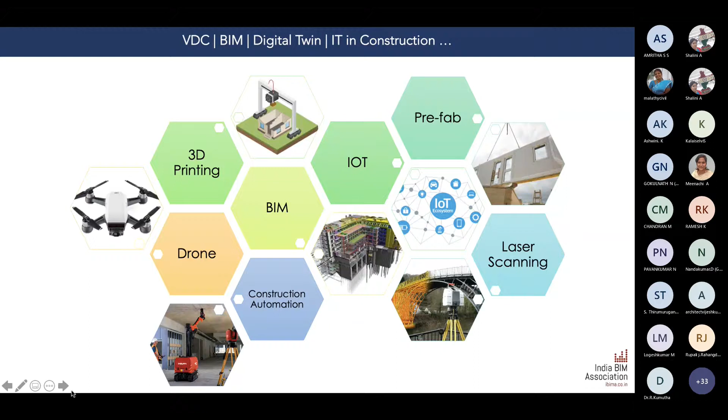Stage 5 and 6 is where the contractors, subcontractors, and the supply chain team come in and start executing the project using that BIM model. Stage 7 is where you hand over the digital twin and the maintenance team starts using it to integrate with facility management systems.

So each of these phases has different participants coming in and different data getting generated, and all of that is managed through a common cloud-based BIM platform, so that anyone can access any data at any point of time - no need to wait for anyone else. RFIs can be reduced, rework can be reduced, clarity can be increased, cash flows can be made easier, and many things - transparency also increases.

Non-graphical data is nothing but parameters, like what the door is made of, its dimensions, thickness, material, who manufactured it, its lifespan, warranty, when it was installed, maintenance schedule, and so on. Documentation means warranty cards, test reports, and other such things get attached to the same element in the BIM model.

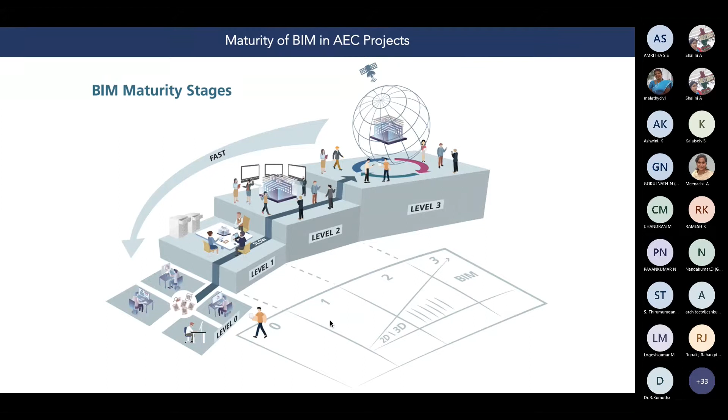So I just want to give you two examples here about return on investment. Department of Health office building in Victoria Street. This is again from the PwC report.

The BIM maturity level here is a little bit high. The client is asking for 100% BIM as per level 2 requirements. Project BIM maturity is around 93% of what the client has asked, and supplier BIM delivery is around 91%. You can see this figure. That means most of the BIM delivery capability, data verification, validation, collaborative working are all like 100%. The construction BIM capability is only 40% here, meaning people don't have that skill for site activities.

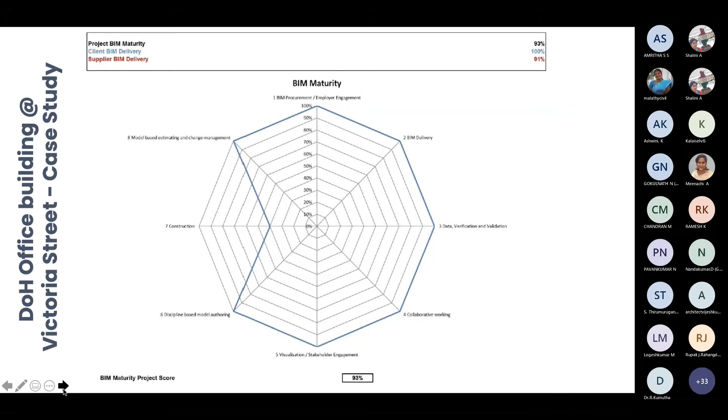If you see the return on investment here, there are three phases: design, construction, operation. The overall project cost is 22,526,574. Out of this, with that maturity of BIM in the project, they were able to save 3% of the actual cost. What they've considered here is 12 years of maintenance, because they started the project in 2016, construction completed in 2017 September, and they're considering 12 years of maintenance. That means with this level of maturity, they're able to save only 3% of the overall project cost.

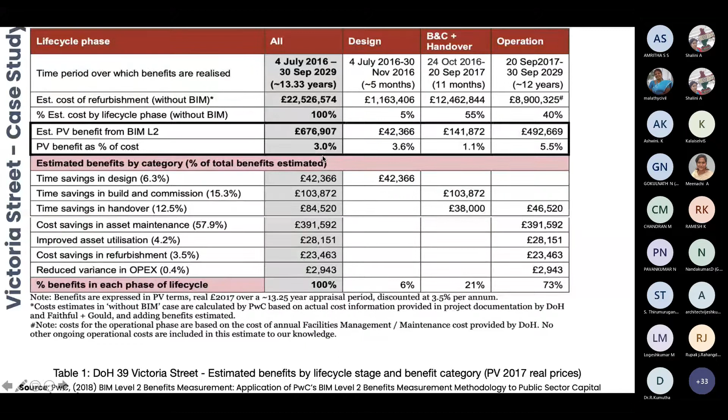But with a matured BIM, you can do better. Looking into the next project, this is a River Foss Barrier upgrade case study. Here the maturity of BIM is a little bit less than what you saw in the previous slides. The client BIM maturity, meaning what the client itself is asking, is only 68% as per level 2. The supplier capability is 80%, and overall project BIM maturity is 62%.

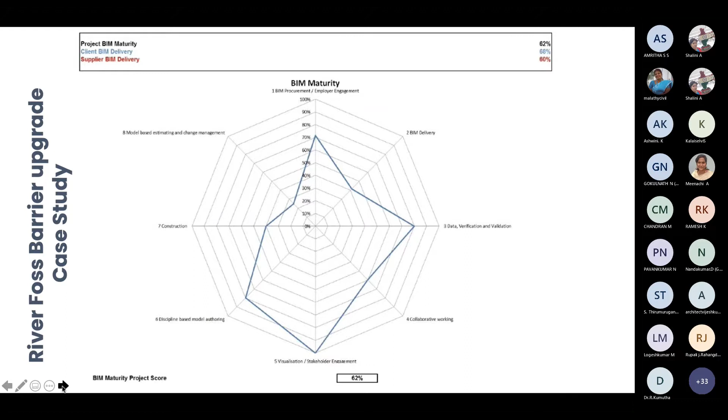As you can see in this figure, all these maturities are less, like 60%, 70%, except the visualization capability which is 100%. So if you see the return on investment here for the cost, 23,748,302 is the overall project cost, including 27 years of maintenance as an approximation. So 1.5% is the project cost savings. This is less than the previous one, because of the maturity of BIM in the projects.

So don't blame BIM, but blame the way we do BIM. If you are not doing a matured BIM, you don't get the returns. This is very much critical to understand, and we need to build capabilities across that so that BIM really makes sense for adding on further.

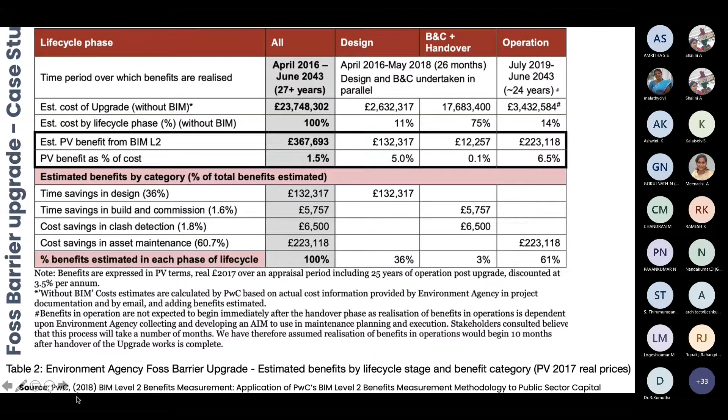Just give me 1 minute. Yeah, sorry for that, there was an emergency call.

So looking into our AEC project stakeholders, that means architecture, engineering, construction. What does this mean? Architecture and engineering includes both design and construction people, and construction includes contractors, subcontractors, civil engineers, and other people coming in. So all these professionals need BIM education. There is still a misunderstanding that BIM is for architects, and for civil it may not be required to some level, and MEP may not be focusing on that. No, there are different kinds of misunderstanding, but it's important for all of us working in the construction sector, especially.

And the skills are different. It's not that everyone needs to learn a software or modeling. There are different skills and competencies, and they have different job roles as what they usually do. It's the same job role they have to do, they cannot change their job roles. If I'm a planning engineer in a traditional approach, I have to be a planning engineer further also, but I have to upgrade for digital projects.

If I'm a quantity surveyor, I have to be the same QS person, but with a BIM way. And if I'm a designer, I should be a designer again. Architect should be an architect again. Civil engineer cannot become an architect, and architect cannot become a civil engineer or a construction manager. So we have to play the same roles.

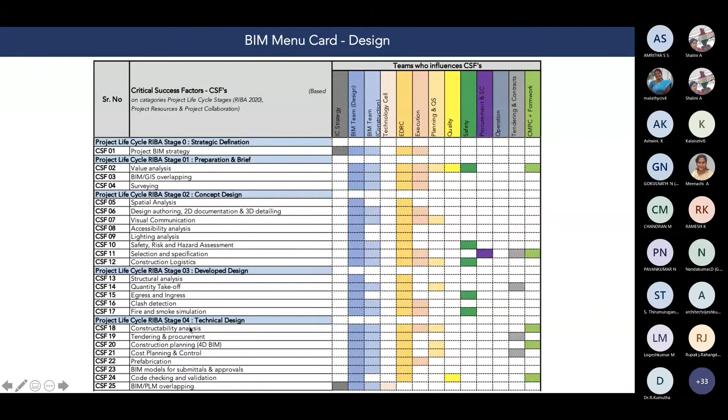So BIM is nothing but like a menu card, and if the client is very mature, he understands by implementing which BIM use cases, what return he can get, and he will ask for them. Most North American clients and a few others are very mature and they use it and ask their service providers to deliver. In India, clients are still not so mature to ask for all of them - they're asking for 15 to 20 of these items, and the service provider is also delivering it.

But today the client is asking for 20 items. Tomorrow, in another one or two years, the client will start asking for all 40 or 50 items. Then we have to have those capabilities built in the company. If we cannot, then we don't have the capabilities to deliver that project itself. So it's very important not only to build team capability within the company, but also among your partners, because you're partnering with those companies to deliver the projects. Only if your company is mature - if your partner is not mature, you're not going to deliver a mature BIM project. So it's important to understand this ecosystem approach, a holistic approach.

And if you see 3D modeling, 4D BIM, 5D BIM, 6D BIM - these are the items, the use cases, that you saw in the previous slides.

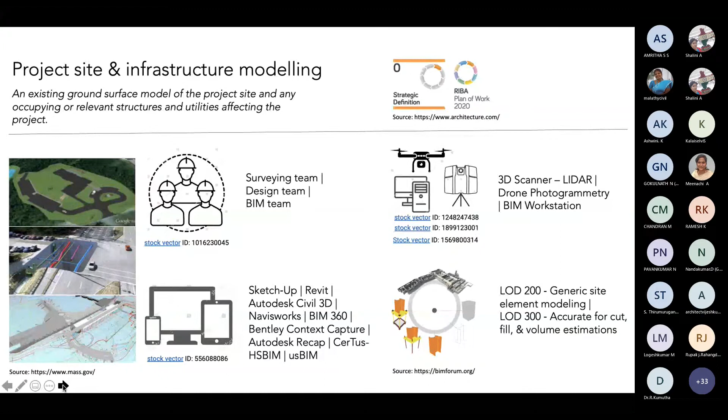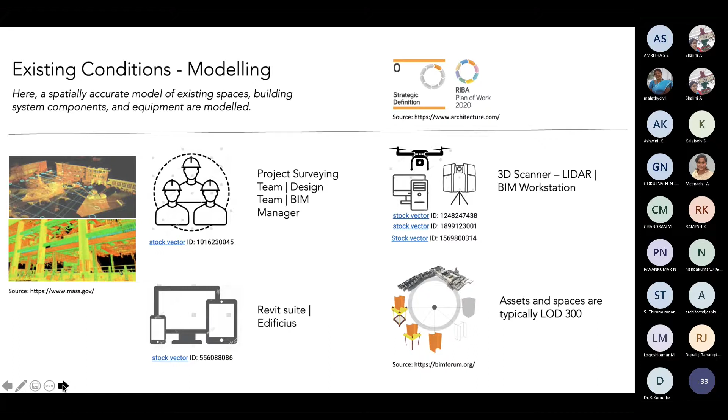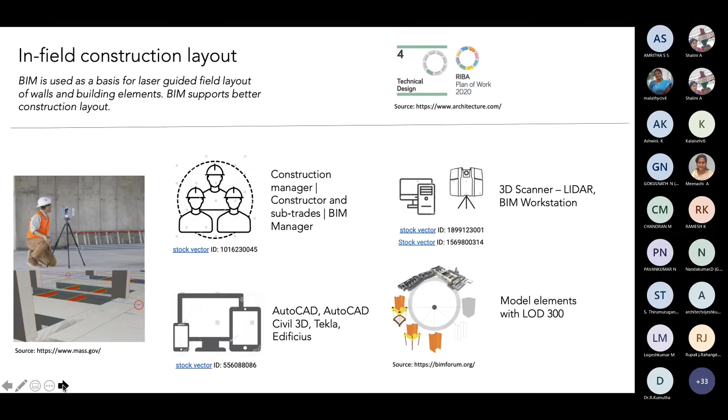So, existing condition modeling: again, if there are existing facilities, you have to capture that. You may use laser scanners to capture the point cloud and use it further. This is for in-field construction layout. For example, if you have a BIM model, you put the points into the total station, and with those points you can guide the site assembling activities for prefabricated components, and also take site measurements and actual installation positions back to the model so it becomes an as-built model.

Laser scanning for the construction activity — you would have seen people doing laser scanning during site construction progress. One use is for progress monitoring: every quarter or six months they do the scan, overlap it on a BIM model, a 4D BIM model, and see if they're ahead or behind schedule. Other times it may be to capture the digital twin, an as-is representation BIM model, so it can be used for facility management.

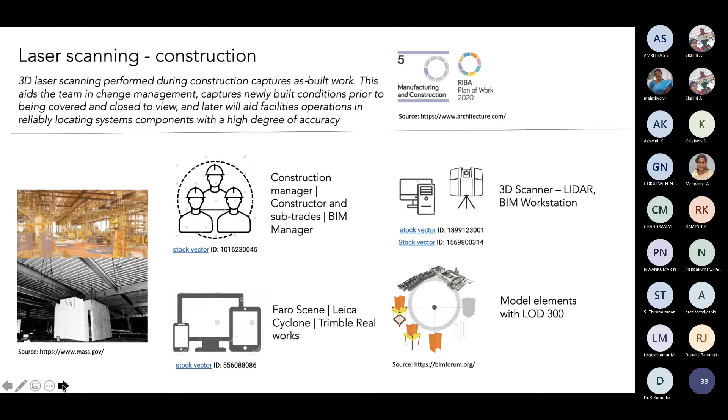BIM rooms help coordination meetings, because you have several site coordination meetings among different participants. If you just put a CAD drawing in front of them, people's imagination goes in different ways. Put a CAD drawing in front of 10 people, and all 10 cannot imagine the same way. But if I put a BIM model on big screens with walkthroughs, everyone is on the same platform, thinking on the same line. So the coordination meetings become easier, resolutions become faster, and it becomes much smoother.

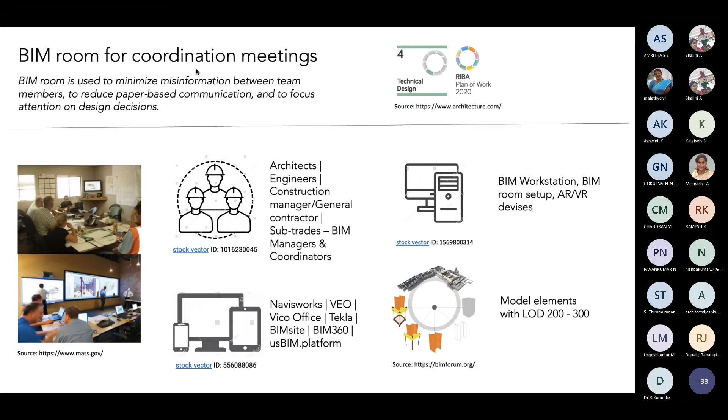You have the whole team on site, because a BIM room is nothing but big screens, projection systems, and people able to walk through the BIM models. Today there are companies having shipping containers with this entire setup assembled, so you can move the container from one project site to another. It has everything set up for BIM meetings, so people just get into the meeting room, drop that container at any project site they want, and so on. Things are automating these days.

Logistic planning involves different equipment on site—several machines, cranes, traveling parts, several buildings under construction, several material dump yards. So it's very important to monitor and plan the site activities and movements of each of these, which we call logistic planning. There are softwares like Synchro, Fuzor, Timeliner, Vico, which help you do complete site simulations so that you can avoid a lot of mishappenings.

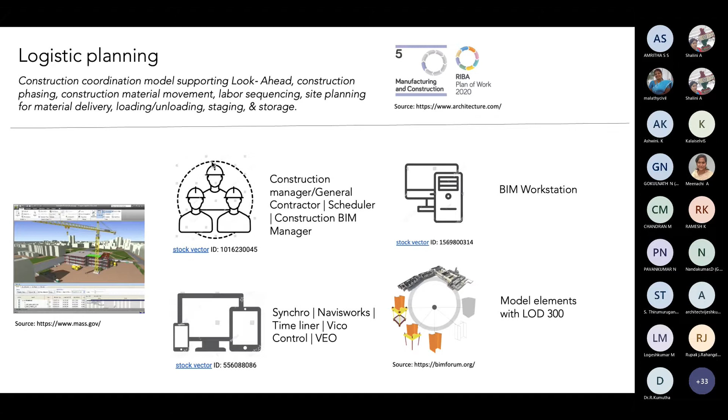Site safety review—again, you can bring in the BIM model for safety simulation. It will tell you what kind of barricades have to be fixed, what kind of safety precautions to be taken. All of this can be used for video simulations and to guide the site team.

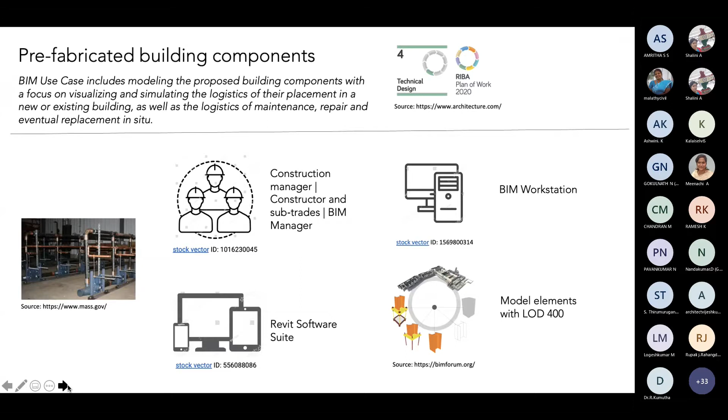Prefabricated building components—using a BIM model, it becomes much more precise to prefabricate anything and then assemble it on site. Even small deviations make it very complicated to assemble them, especially in industrial projects and MEP installation. So BIM becomes very critical for prefab.

Digital twin is nothing but having an as-is BIM model. People may be confused—before, people used to say BIM, now the client is asking for a digital twin. What is this, and how do you deliver it? BIM is the design model the design team has developed; once coordinated, we call it the BIM model. Once you start using that BIM model on site, whatever changes happen on site get updated onto the BIM model. During handover, you give the exact replica of what has been built, updated on the BIM model. That is called a digital twin.

Clients ask for this because they want to know what has actually been built, in a virtual model—they don't want what you had planned. You may have planned a hundred things, but what was executed is what matters at the end, right?

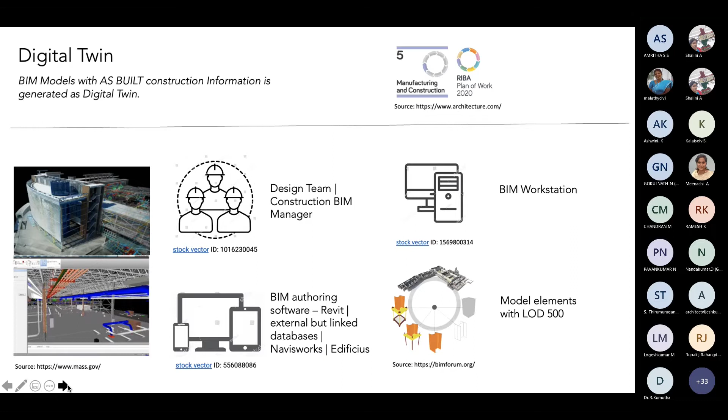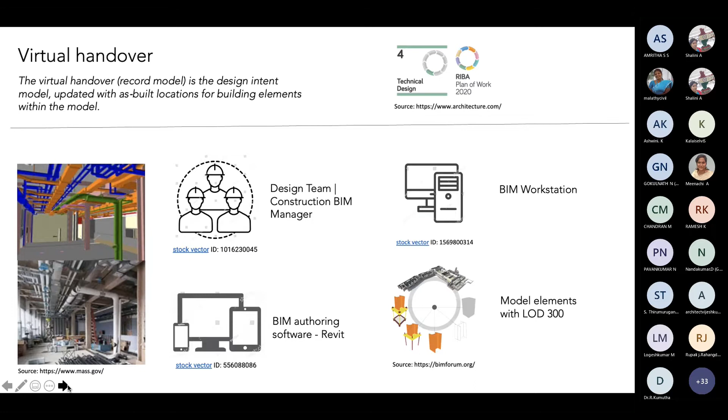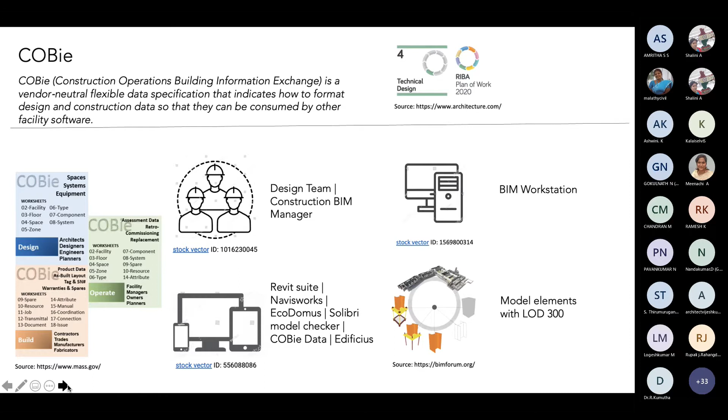For that, the client would clearly specify these are the components, these are the parameters, and these are the documentations I need. And that makes it an easy way to extract the data for further integrations.

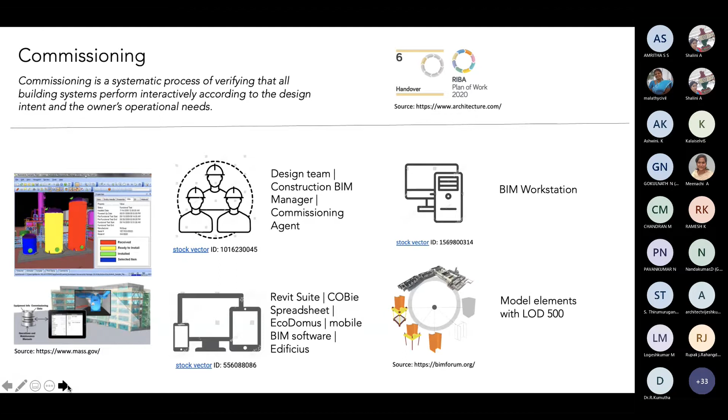Commissioning is a systematic process of verifying that all the building systems perform interactively. That has to be taken care of before you hand over the project, and BIM will help in a better way to do that.

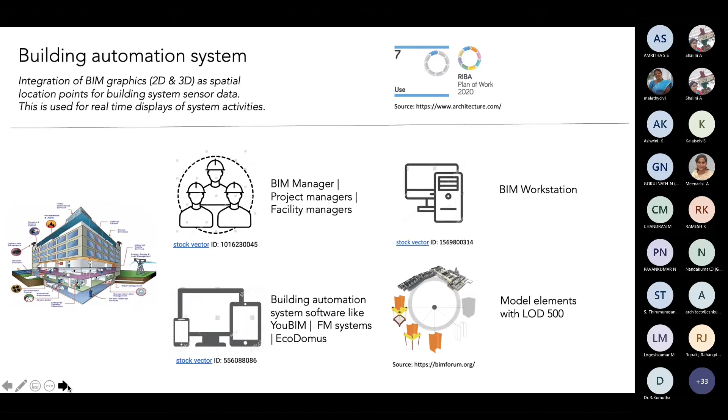Maintenance training is very critical because the team which has constructed is not the same team which is going to maintain, and you have to provide them with maintenance training. So that kind of support also becomes much easier with BIM.

And today you use several equipment like drones, for example.

How much time do I have, ma'am, for a discussion? Sir, we can stop at 10:40, then we can go for a question and answer session. Okay ma'am, thank you. I have a short video I will play for them so that it becomes easier. Your session is up to 11, sir. Okay okay ma'am, I'll plan according to that.

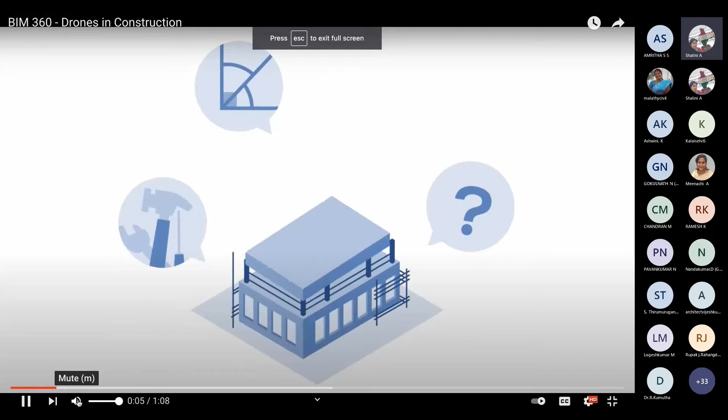What is happening is I'm wearing an AirPod. I will take it out so that the audio will be clear for you.

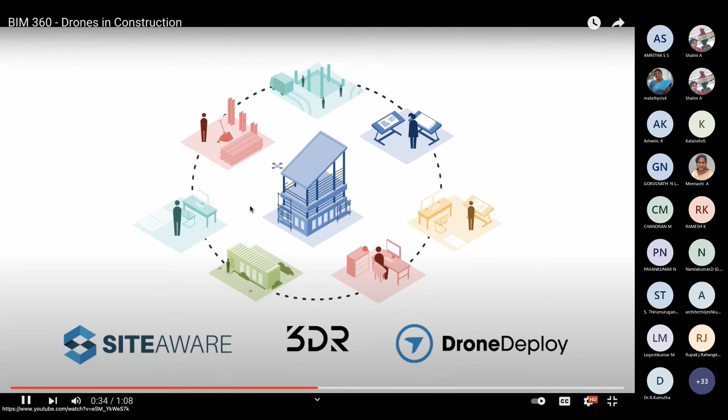Before drone technology, construction projects are complicated, and keeping your eye on everything can be tricky. Before drone technology, the collection of aerial data was difficult and expensive. But in recent years, the use of commercial drones has become more widely accepted. Drones can be used to increase safety and quality for site material tracking and provide owners with a detailed view of what is happening at any given time. With drone technology integration partners, teams can collect data at various points throughout the project's lifecycle. You can survey sites before construction to help with planning and logistics, fly drones at preset times to review the construction process, and after construction to verify as-built conditions. The integration of drone data into your project workflow can be valuable in keeping the project on time and on budget.

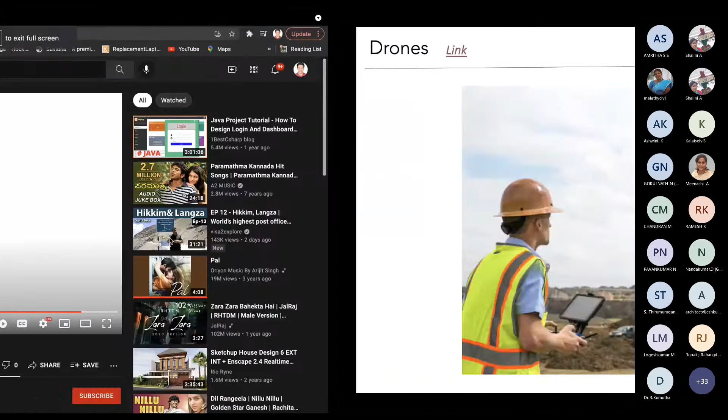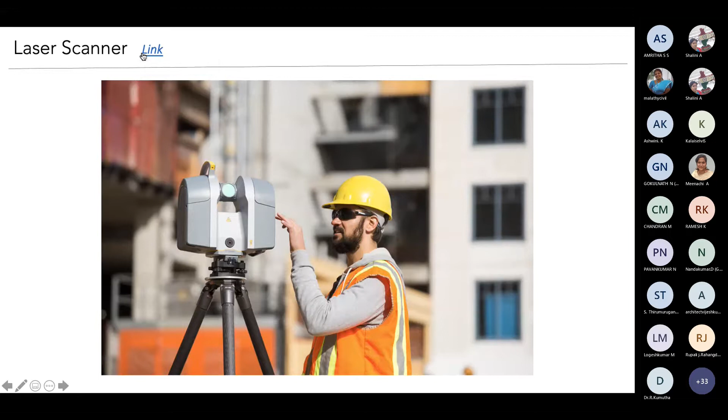It's nothing to do with Autodesk or BIM 360 specifically, there are several common data environment platforms. I just want to give you a brief on how drones can be used for some site activities. This is for laser scanners. You would have come across laser scanners; their price range is from 30-40 lakhs to 1-2 crore. It all depends on how fast they can collect the point cloud data, how detailed you want it, and how heavy or lightweight it is. There are different factors on which laser scan pricing varies.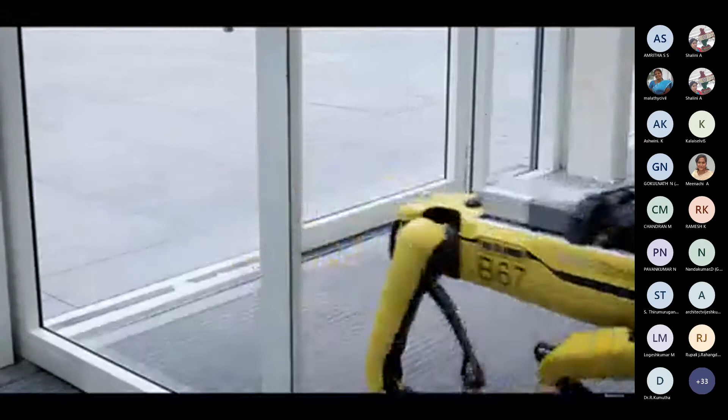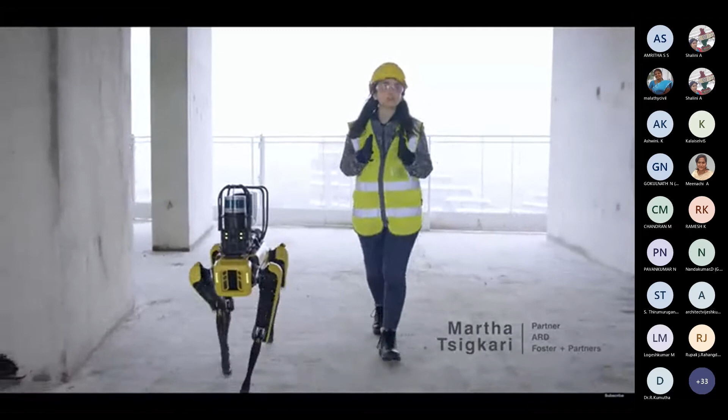Here at Foster & Partners, we have been at the forefront of research for the built environment for over 50 years. We have teamed up with Boston Dynamics as part of their early adopters program for Spot, the semi-autonomous robot, to investigate how cutting-edge technologies can push the boundaries of both design and construction while enhancing productivity, efficiency, and collaboration. 3D laser scanning technology to capture and monitor on-site progress was integrated in the strategic plan developed by our Applied Research and Development Group.

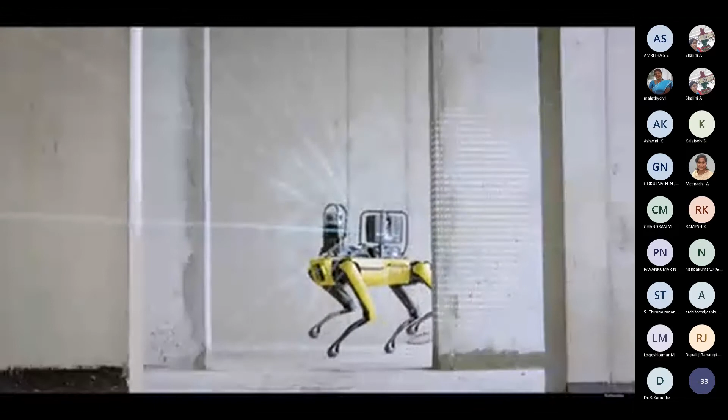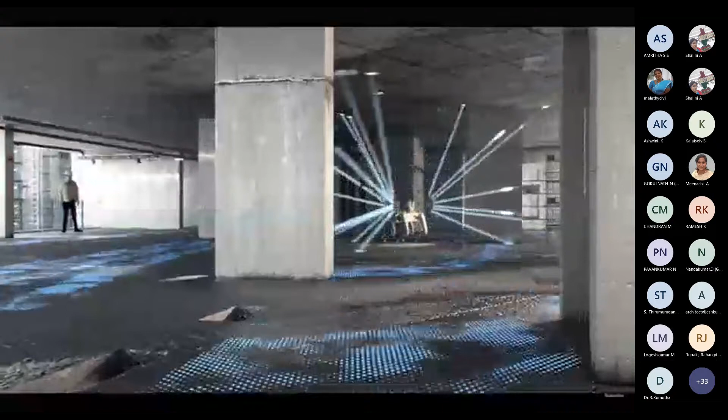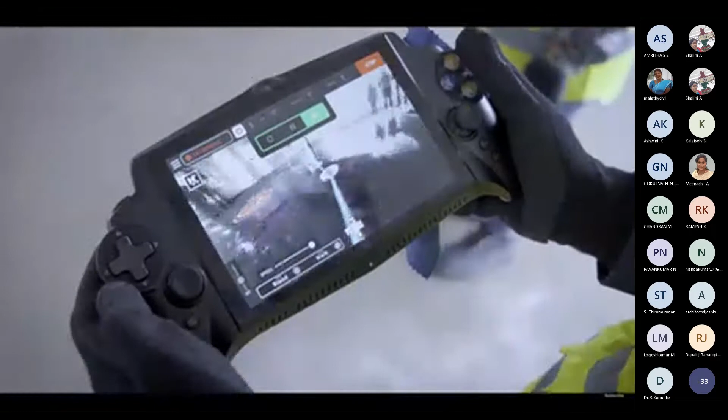This enables Spot to capture constant, quick, and consistent scans of construction sites. This precision monitoring tracks progress while still checking as-built versus as-designed models. Scanning and post-processing times have been reduced from weeks to a matter of days, while freeing up staff resource. Spot's remote control features greatly improve site visit safety and efficiency. Together with its ability to follow a pre-mapped route, Spot provides consistent repeated scans, navigates difficult terrain, and can access hard-to-reach areas on site.

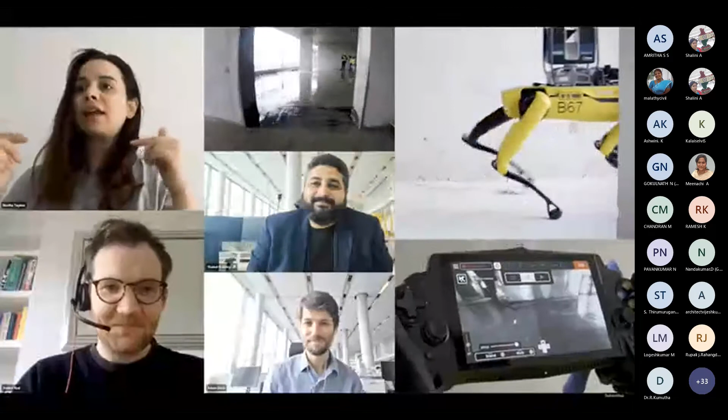This technology could be used to create four-dimensional models of our buildings, highlighting how they change over time. Combined with data from sensors that read environmental conditions and occupancy, we can create an intricate model of how people, furnishings, and environmental conditions interact. These four-dimensional models could become virtual collaboration spaces, available to people who cannot physically be in the same location. Foster & Partners and Boston Dynamics will continue to push the boundaries of innovation, bringing the technology of the future into the hands of our designers today.

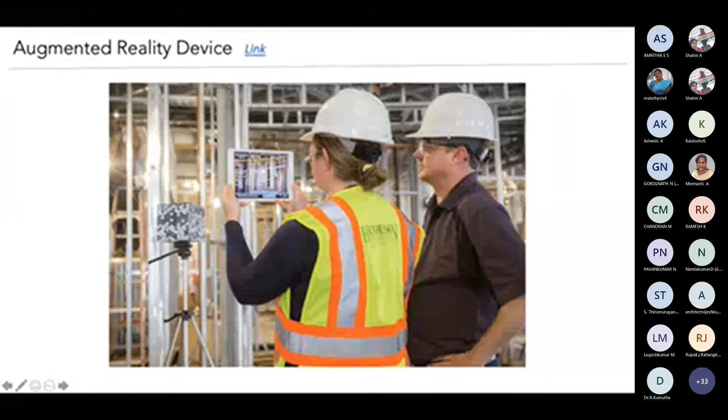Okay, this is for augmented reality. You may be using iPads and other devices today.

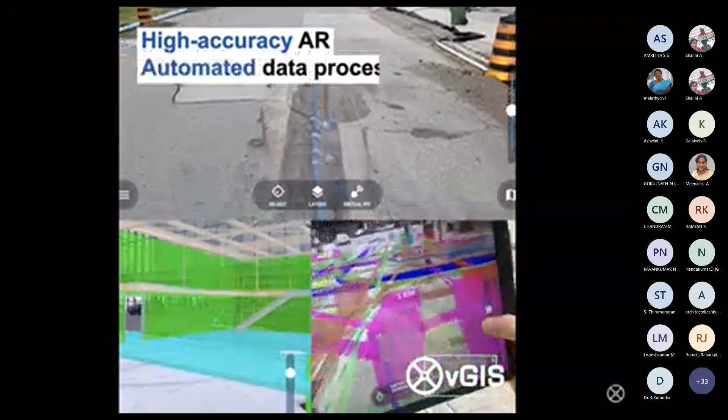This is for a BIM cave when you have small space and still want a better walkthrough visualization. You can set up this kind of cave in just half a day, with 3 projection systems, and have a better walkthrough of the real facilities.

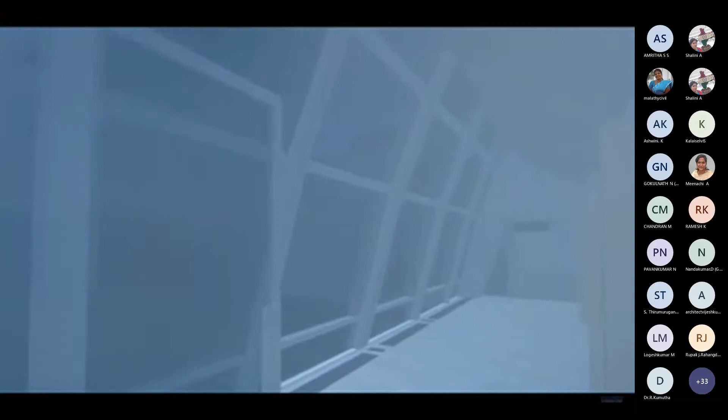Step into your project and visualize reality with this fully immersive and collaborative environment. Engineer, optimize and finalize better outcomes whilst interacting with your project BIM.

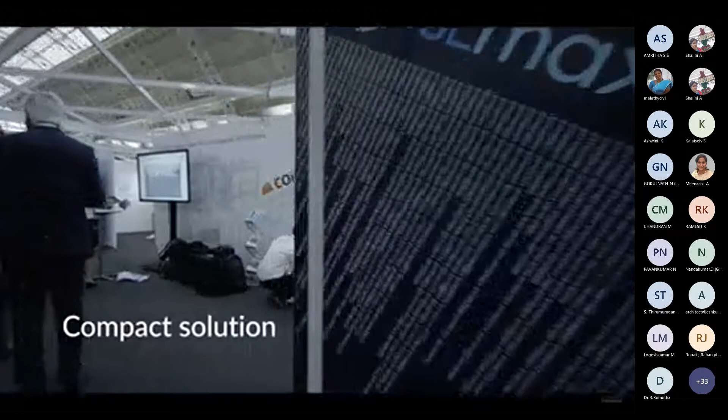Introducing the Fulmax Cube, the flagship product of Fulmax's innovative virtual and augmented reality solutions. This compact solution will fit into any office space and even site cabins, comfortably allowing teams of up to 6 people to simultaneously view and discuss the project in detail.

Assembled in less than 3 hours, with user training taking just 12 minutes, the Fulmax Cube can be up and running for a design review in less than half a day.

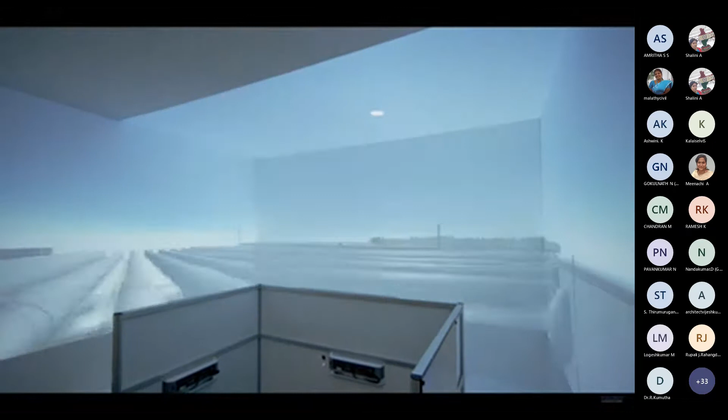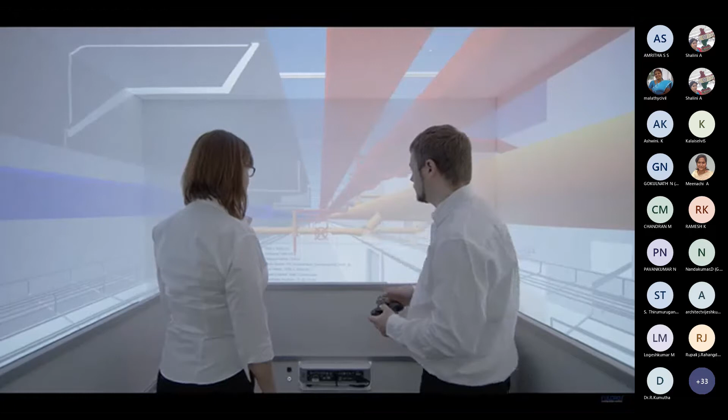Access BIM data live while in the virtual environment, enabling teams to interact with graphical and non-graphical information to make better decisions, resulting in better design and operational outcomes.

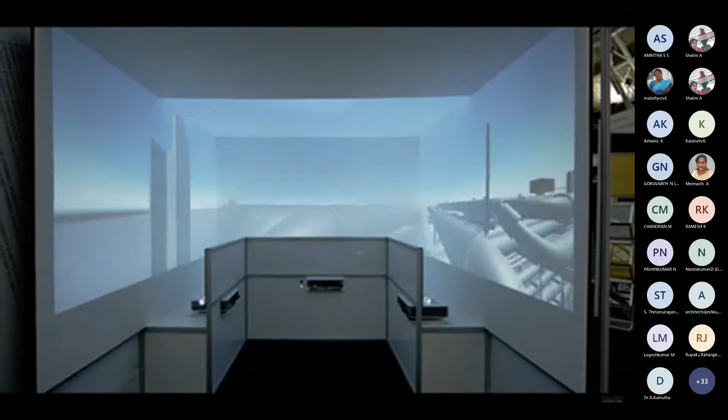Powered by the Fulmax Keystone software, your project teams can easily take their virtual design and construction data from authorship to virtual reality in minutes. Project security is maintained as model processing happens within your organization by your project teams.

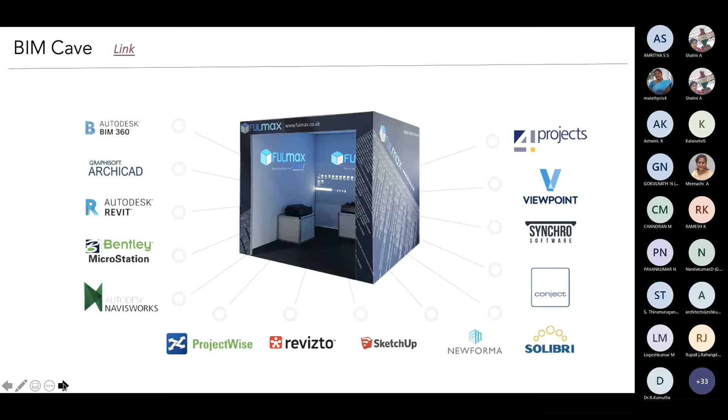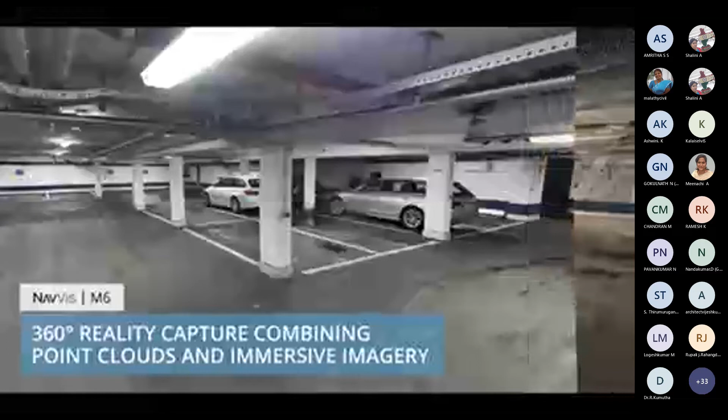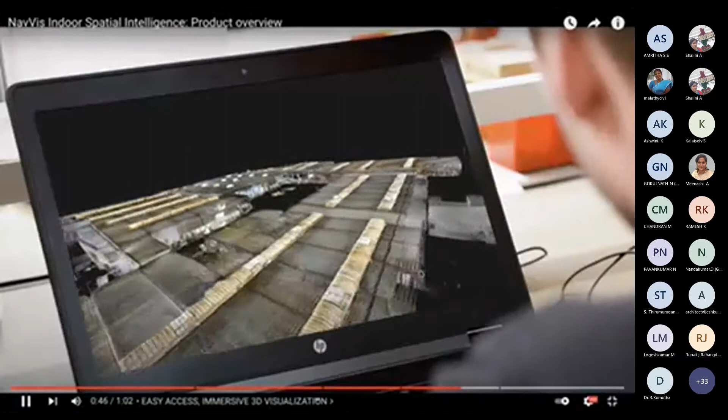With this, you can capture the interior point clouds and then use it for whatever interior planning you need to do. Usually any IT facility needs interior changes every 5 or 10 years, so this will be a better solution for that kind of activity.

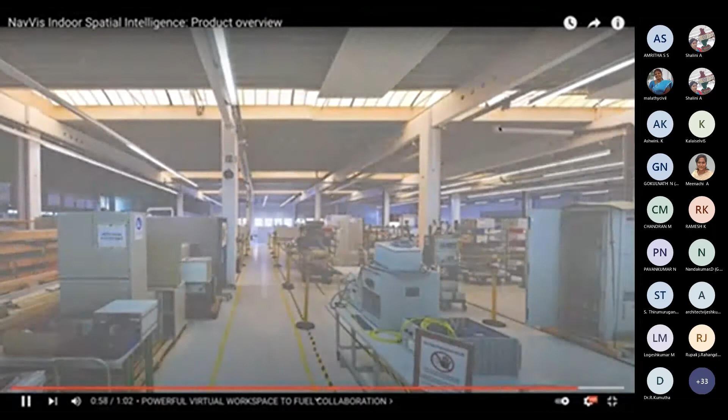So this is for a smart construction helmet.

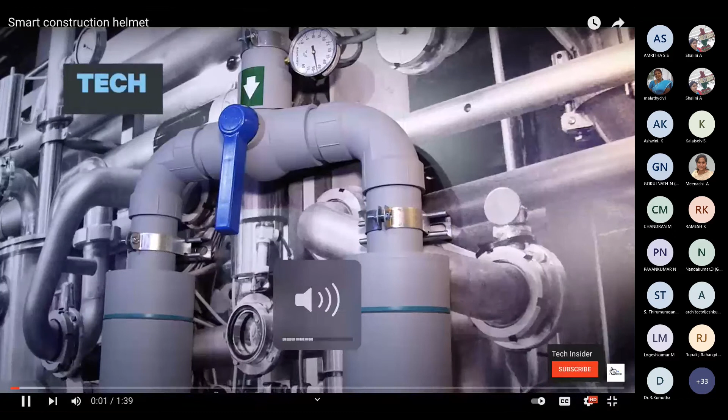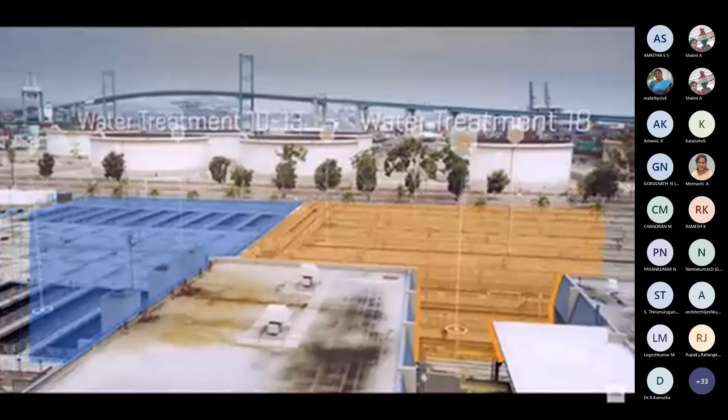Hi, I'm Matt Cameron. Here we have one of our prototypical users, a typical field service engineer. Sam, can you walk us through a couple of the use cases for the smart helmet and show us what it can do? We'll look at the work instructions first.

Great. So this system behind me is a valve system. The first thing the helmet does is detect the environment, and it will notice there's a pressure anomaly when I start looking at the gauges. I look at the top gauge and get a reading, then the bottom gauge and get a reading, and the system gives me a readout and detects an anomaly.

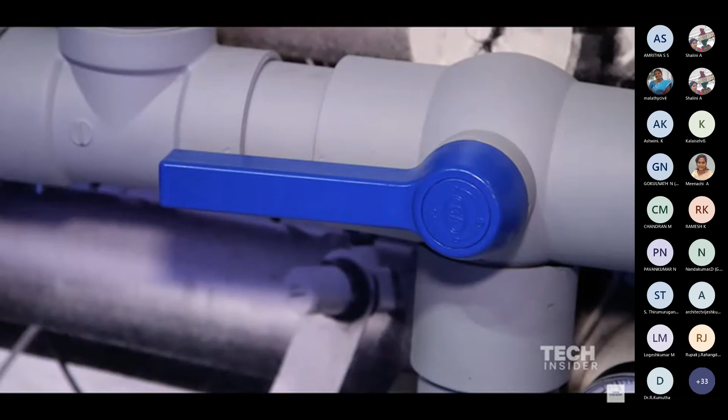It then guides me through simple work instructions to change the filter. So I step forward, replace the filter, confirm done. Second step, confirm done. And now the system is bypassed.

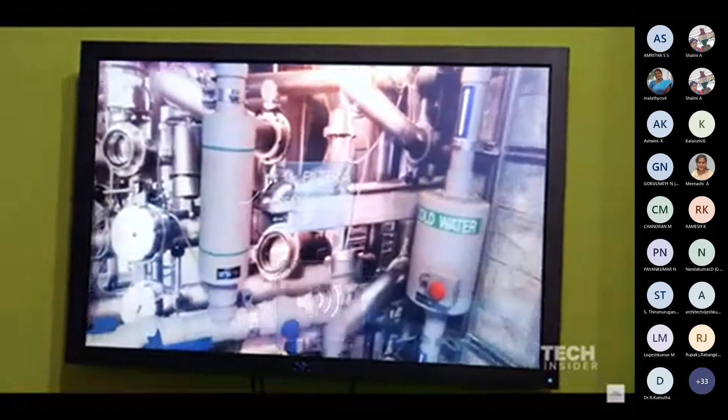For that first use case, we tie in content from the existing work systems and work process data, but you don't need that data to make the smart helmet useful. You can use it right out of the box for, in essence, superhuman capabilities, like the ability to see thermal information over the top of the real world.

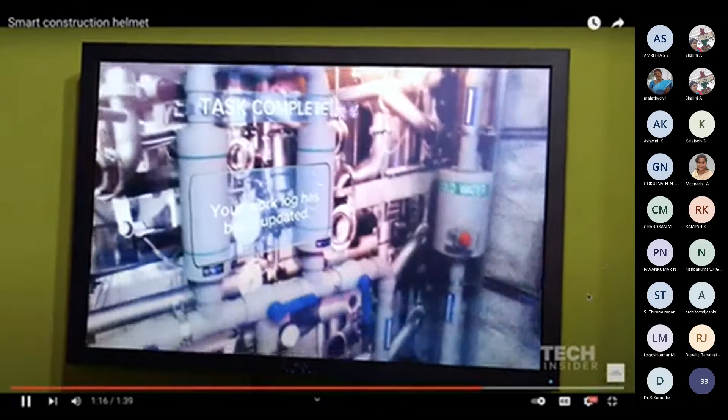So if I look at this wall, you'll see a camera output, and you can see what I'm seeing. On the face of it, everything looks normal. But when I click on thermal, you can see the hot water pipe has a blockage and the lagging is clearly damaged. The voltage system here also has a fault behind it. Since things generally get hot when they're about to fail, I can really easily see that things are wrong in this scenario.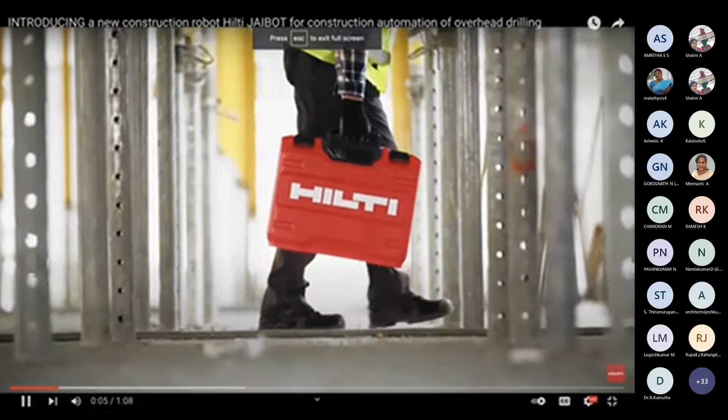It's a site. At Hilti, we strive for change. Around the world, our innovations have shaped how work is done on today's job sites. Today, our ambition remains as strong as ever, to drive productivity through innovation.

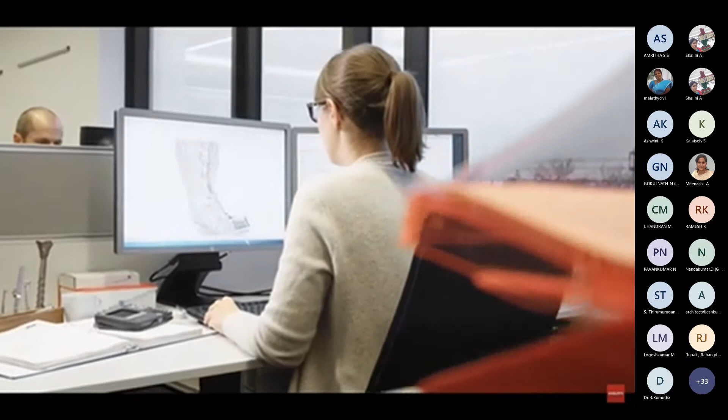With BIM, we've already entered the age of digital planning. What if we could use the same data to not only streamline processes, but simplify trade collaboration and automate repetitive and strenuous tasks? Now our vision becomes reality.

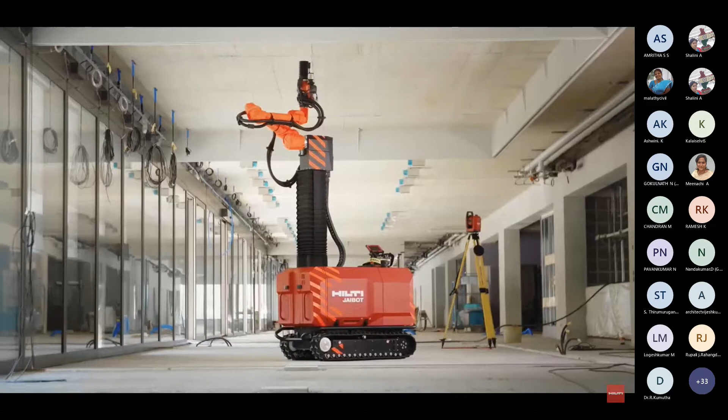Introducing the Hilti JAIBOT, a semi-autonomous drilling robot for ceiling installations, helping you to deliver MEP projects on time. Let's not wait for the future to come. Let's shape it together.

For all of these things to happen, you may be from an educational institution, a company, or a client side. Today, if we have to deliver digital projects with BIM, some clients are matured, some are half matured, some are fully matured, but there is a requirement for all the skills and usage of these equipments and softwares, to build the BIM models and make use of that for better project management to align with Industry 4.0.

How do we do that? Especially to do this, first you have to have digital transformation strategies in place, no matter if it's a design company, contractor, or any other kind of company, because it's not one day's work, it's capability building in an organization. Your company may be 1,000 people, 10,000 people, 1 lakh people.

You have to make the transformation and skill building and change in the way we work, the workflows, the softwares we use, the equipments we use, and the way we manage the data. All of these things need change. And it's a process of 2 to 3 years, a roadmap which has to be laid on how we transform for a digital way of delivering projects. So digital strategy is very much critical for any of these activities to happen.

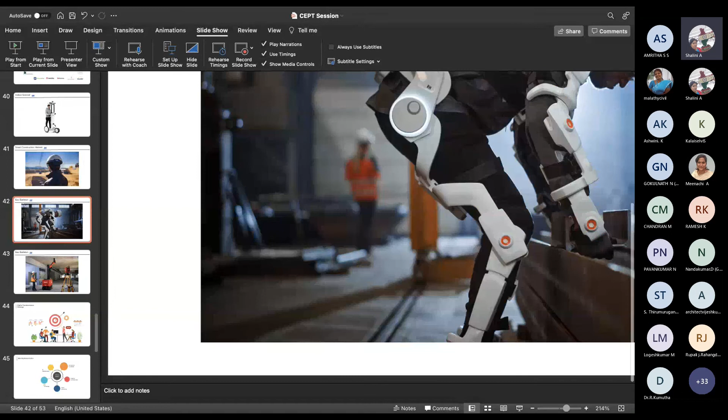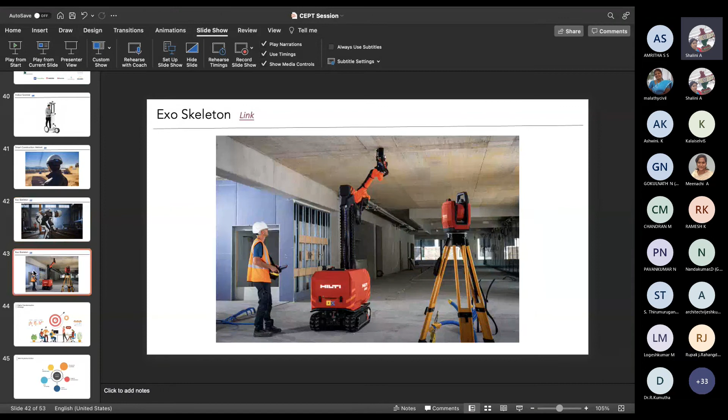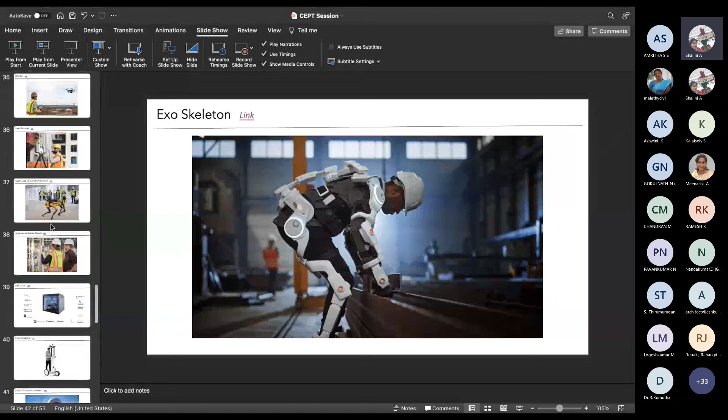Then thank you to all the audience, especially for attending the session early morning. I feel I have not bored you in the first 1.5 hour session. I hope you'll have further good sessions also in the coming days through this FDP, which will help you implement new learnings for your students, because we are the people who have to give the same education to hundreds of other students. I hope this is very much helpful and directional for you to plan the way forward on the digital side. Thank you so much to Sona College and also the ACT for giving this opportunity. Have a nice day, thank you.